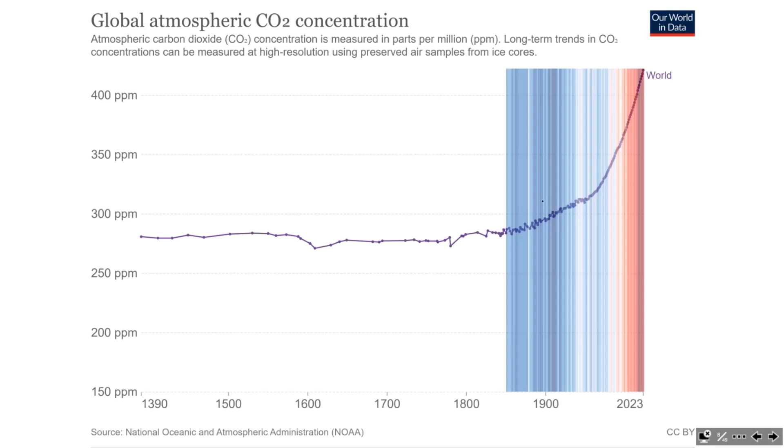Flooding in Pakistan, this is 30 billion dollars worth of damage. 30 million people affected, 1 million homes destroyed, 2 million people displaced, and this was last year.

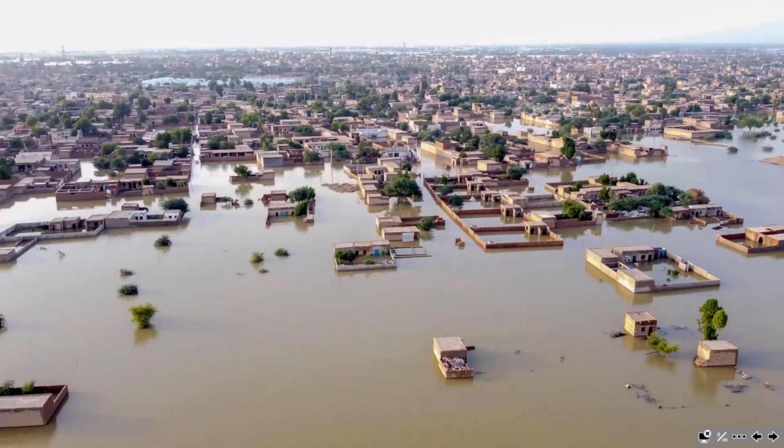Wildfires in Canada. This has been burning since April. Today, I checked this morning, there are 700 separate wildfires burning in Canada, still out of control. It's the worst wildfire season on record in North America.

And we're going to see more of it. It's not going to get better, it's going to get worse. We're going to see massive loss of biodiversity, environmental destruction, crop failures, loss of safe drinking water around the world, mass migration, and conflict. Coming back to that $30 billion of damage in Pakistan, the estimates from the IPCC, the Intergovernmental Panel on Climate Change, are for annual damage of the order of 500 times that when we seriously get out of the foothills and up into the mountains of climate change.

Again, another really important graph where what you're seeing is kind of fairly obvious. These are annual CO2 emissions. In 1850, the United Kingdom were responsible for half of the annual CO2 emissions in the entire world. We have played a major part in this in our history.

And again, what's interesting on this graph is not that obvious correlation between pumping CO2 into the air and temperatures constantly going up. It's what happens on the right-hand side of this. We need to change, and we need to change really quickly. And we are not, as I said earlier, we are not immune to that as bridge and masonry arch engineers.

People will tell you, bridges, really? We need to worry about bridges in net zero? We've got electricity to worry about. We've got to decarbonise the grid.

Unless they all get to net zero, we are continuing to increase the global atmospheric concentration of CO2. And if we are continuing to increase it, we are continuing to increase the temperatures and the associated damage. And it does not stop until it all goes to zero, or we find some magic way of taking CO2 out of the atmosphere to balance it.

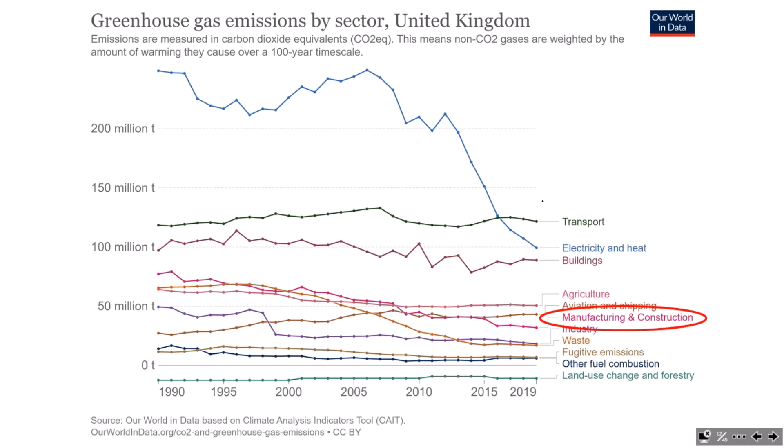So our bit, this is what we're talking about. We're playing a part in that bit there, manufacturing and construction, and decarbonising it.

So a little zoom into construction. Why is construction a problem? I think some of you will know about this. This is another graph. I'm nearly going to finish with the graphs, hopefully.

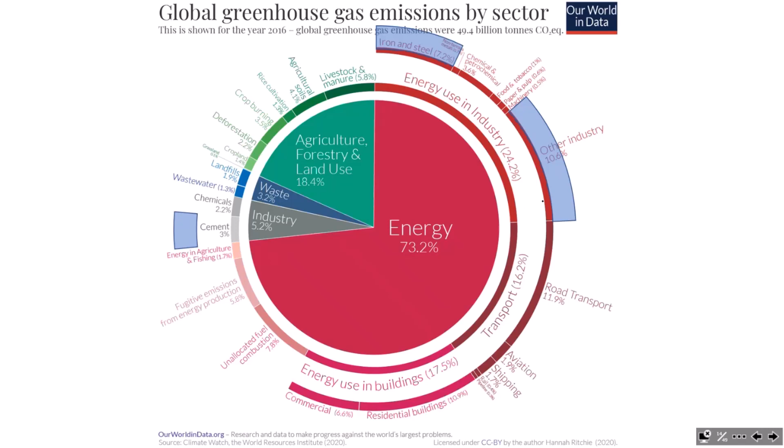And for the things we deal with in construction, it is overwhelmingly about production of materials, production of cement, concrete, and steel in our cases. Site logistics, site plant, transport, these things matter undoubtedly, but materials is where we're at. Our use of materials is our embodied carbon that appears on those graphs.

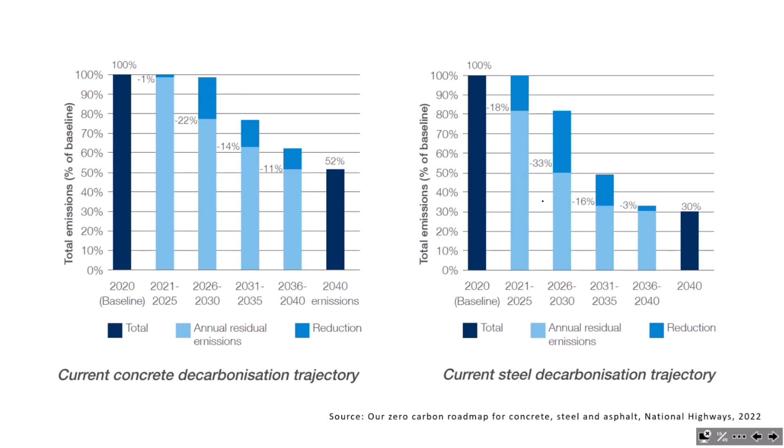These forecasts, the pale blue line, are the predicted trajectory for materials based on conversations with suppliers, so this is what suppliers are telling them they think they'll achieve. On the left, concrete, suppliers are saying by 2040, which is way too late, we'll probably get down to about half the emissions of making that material today. Steel is a bit better, it's much easier in the steel industry if people invest in it. These are difficult materials, and the key to addressing them is using less of them, because we're not going to magic away their emissions technologically.

That leads into climate action. So what does that mean we actually do within the construction industry? Bit by bit, you'll hopefully see me inching towards masonry arch bridges here. I know people want to get to that bit.

We're quite fortunate in the construction industry. We've got this very good standard, PAS 2080, carbon management for buildings and infrastructure. Excellent document, it tells us what to do. It's a process-oriented document, it's really boring, it's the quality assurance of carbon. But it has within it some real gems and some real key things that people can take away.

One of them is another graph, a slightly simpler graph this time, called the carbon reduction hierarchy. The entire construction industry should be thinking about three things when deciding what to do differently. The first is avoid, meaning avoid doing things that cause emissions, unless we have to do those things to reduce emissions elsewhere. Building wind turbines, for example, you can't avoid putting steel into wind turbines if you want to reduce energy sector emissions.

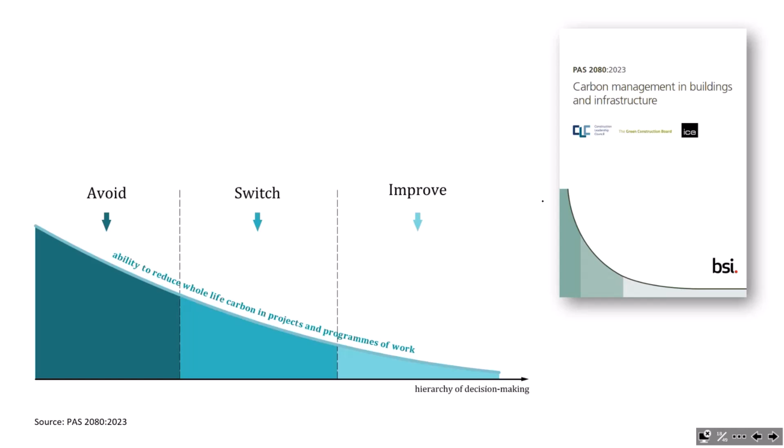Switch means making different decisions, perhaps a different type of bridge, or different materials in a bridge, in our case. Avoid might mean not building a bridge at all, where that's feasible. And then improve means being more efficient, efficient use of materials, structural optimization, those sorts of things. Once we've decided we're going to build it and roughly what kind of thing it'll be, can we do it with less stuff? So they're quite a good lens to look at what we do.

PAS 2080 provides the inner rings here, a lovely project life cycle, this is PAS 2080 and GRIP and RIBA all mapped against each other. If you read between the lines in the standard, it's roughly saying the best time to avoid big emissions is in the strategic definition phase of a project. If you can decide you don't need to build this project, or do it in a completely different way, build a ferry instead of a bridge, you're going to avoid a lot of emissions. We can't always do that, so we get into the optioneering phase, look at how we can do things better, make some different decisions - that's switch. And then the rest of it, design, delivery, operation, etc., is improve, trying to do things more efficiently.

This is from PAS 2080, the stuff around the outside is just my interpretation of it. And I think this is wrong, particularly in respect of what we're here to talk about with masonry arch bridges. I think this is a better diagram, because actually our best opportunity to avoid using new stuff, to avoid making the decisions that generate new projects, is in the operation and maintenance phase. Keep our existing stuff valuable, keep it usable, repurpose it, recover it, revitalize it, because then you don't get into this need to build new stuff at all. We see a lot of that in this industry, and actually we see a lot of it in the masonry arch bridge world - bridges being infilled, renewed, replaced, where maybe they don't need to be.

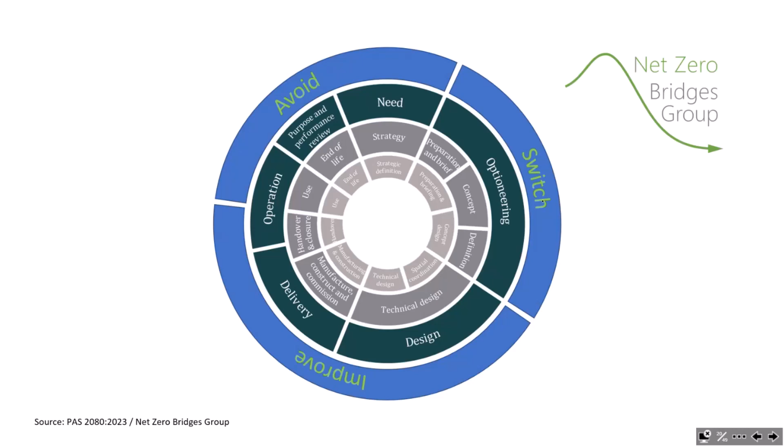Let's just be a little bit tentative about it for now, we can have an argument later. But nonetheless, that maintenance cycle, which is what ERMABI is tackling, and our understanding of existing assets primarily, that's our key opportunity to save loads of carbon. So you're all fighting the good fight if you're involved in that. So, masonry arch bridges - okay, no idea where I'm at for time without my notes, hopefully okay. Right.

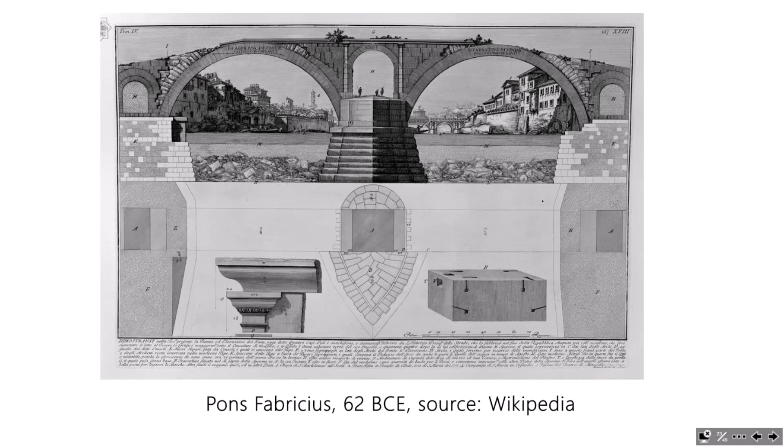Literally walk 50 metres away from that on the same project, we start getting into things that become slightly less straightforward. This is a brick arch pier railway viaduct. Hamish knows this well, along with some of my colleagues. This is really quite an interesting one. This is an existing brick pier, which had cracked down the middle of the outside face and appeared to be operating as two leaves, operating semi-independently, with this crack, like a sort of shear failure right down the middle of the thing. Again, good luck finding that in standards that John Shave refers to, or possibly even analysing it with some of the tools that we've got today.

We stuck some pre-stressing bars through it and stitched it back together. It stopped doing that and we walked away. But we might like to do better. We might like to understand a little bit more about, did that work? Was it safe? Freight trains were running over the top of this on a pretty much nightly basis. We don't know, frankly.

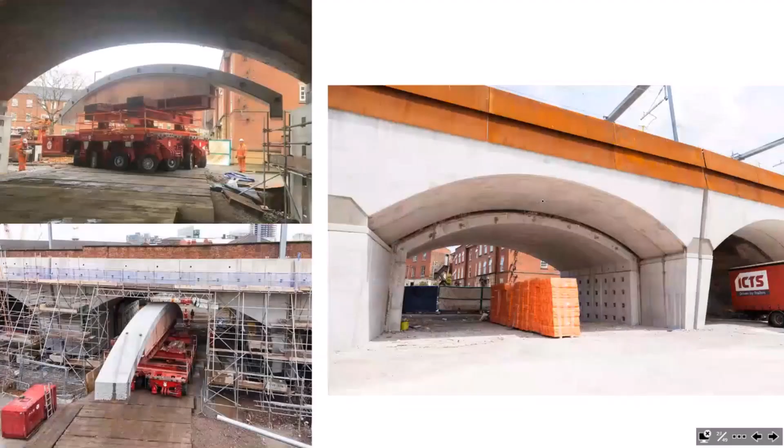So us engineers, we love our concrete, belt and braces. What are we going to do about it? Not really sure. Let's underring it with precast concrete. Let's pre-stress the precast concrete together. Let's stitch the piers together with pre-stressing and new foundations and all the rest of it.

Definitely sorted the problem, I'm absolutely certain. Was there anything else we could have done? We had lots of ideas, lots of theories, but did we really understand what was going on? I'm not sure we ever truly did. Did we understand whether it was safe, given we were continuing to run trains over this daily, with an RA rating less than the assessment required, let alone all these cracks, even before you take the cracks into account?

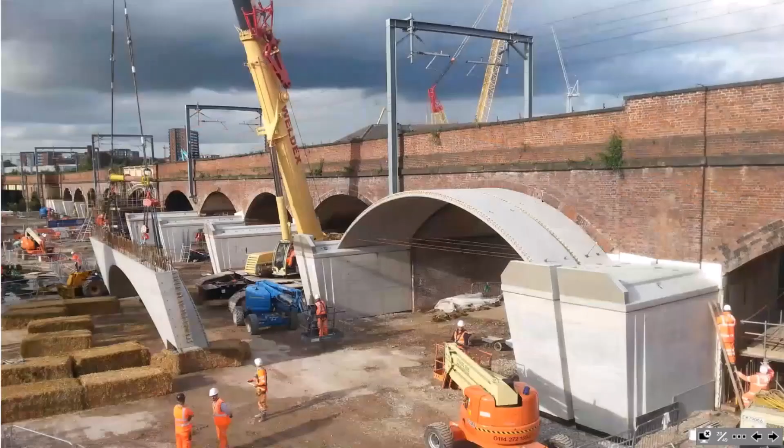Those pictures also illustrate one of the other things we do. We don't just preserve existing bridge structures unaltered. A big part of our work is alterations. This was widening of the same viaduct to move the railway over and put in a new railway junction, all done in precast concrete, really complicated stuff as you can see.

The interesting bit was trying to work out what would happen at the interface. The original proposal was to stitch the two in with stainless steel stitching bars. We were a bit nervous about that, to be honest, so we employed our friends at Bill Harvey Associates, who set up cameras and measuring poles, giving us graphs of movement vertically, longitudinally, and sway.

The movement of this bridge is phenomenally complex, moving in three dimensions like this every time a train goes over it. It gave us the confidence to deal with the interface issue, so we wouldn't damage the track or the interface going across it, and could tolerate the movement. This is about movement rather than capacity, but it's really all about understanding whether we know how these things behave and whether they're safe.

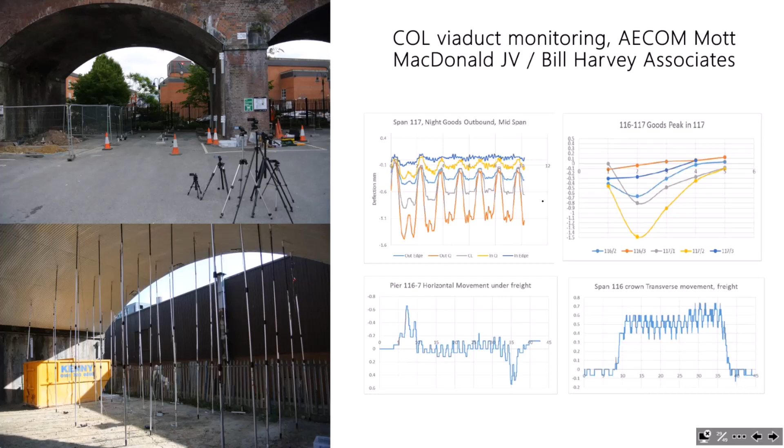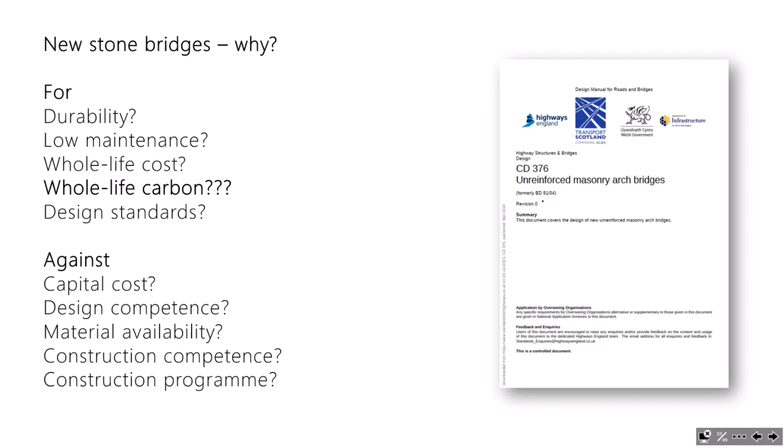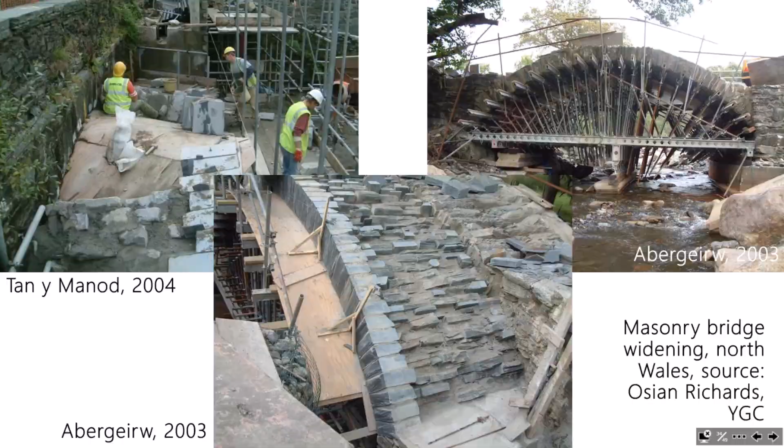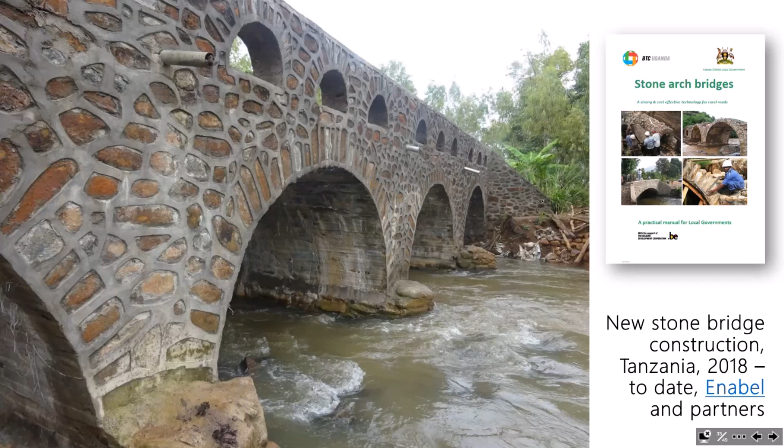Some people will have seen these before - this is out in Tanzania, a very different sort of economic and construction circumstance. These are partially funded by the Belgian Development Agency, Enabel. They've got a design manual, and I think they've done about 70 of these so far. Within that situation, it's pretty much definite that these are cheap, high social value in terms of employment, low carbon, robust, durable. Why would they not be doing this, other than some other country wants to sell them loads of steel or something like that? So it can definitely be done, and not with massively high technology.

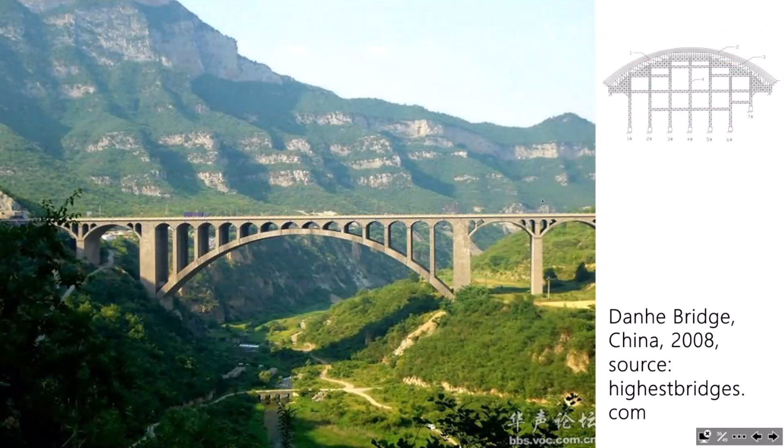The classic favourite - anyone want to guess what the span of this is? I can't tell because I've not got my notes, but I think from memory it's 150-odd metres. Probably certainly the last very big masonry arch bridge the Chinese are going to build. Even for the Chinese, this was getting expensive when they got to these sorts of spans, and you can see from the scaffold at the top right quite why that is. But that's going to be a very durable bridge short of earthquake - that's going to last a long time. We're not going to be worrying about rusty rebar and concrete cancer and things on that.

So apologies if you're just here for the arches - I'm going to slightly move away from arches, and this is moving away from arches very quickly.

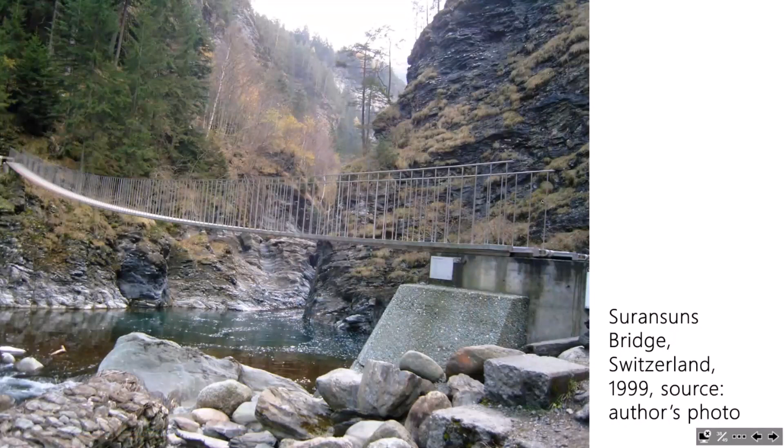Things we know about stone - this is a classic stone bridge, Punt Suransuns in Switzerland. It's not an arch bridge, or is it? The stone here is restrained and pre-stressed by the stainless steel bands upon which it sits, so all the stone on this bridge is in compression, just like an arch, really - it's upside down, but never mind. Having jumped up and down on this with a load of bridge enthusiasts, it's really stiff and massively economical.

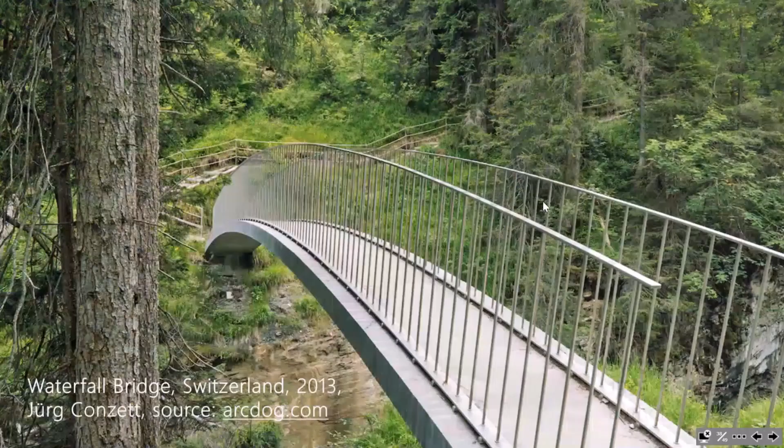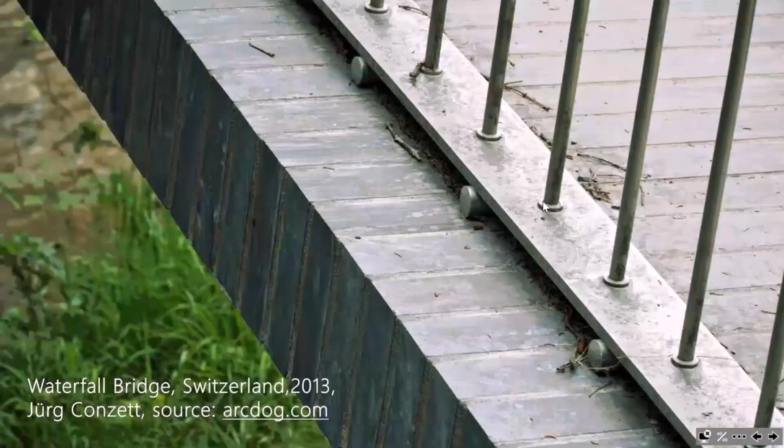What would happen if you turn that upside down? This was designed by the great Swiss engineer Jürg Conzett, and he has turned it upside down - this is the more recent bridge, the Waterfall Bridge, done the other way around. Again it's just stone blocks, a very slender arch, pre-stressed by stainless steel bands which form the bottom of the parapet on top of it, pre-stressed in at either end, allowing you to make it very slender - keeping your thrust within the arch, if that's how you want to conceptualize it. It's a really ingenious little piece of bridge. The stainless steel band sits on rollers, which give you a frictionless surface when you're pre-stressing it, and incidentally they also mean you don't need to drill through the stone to support the parapet - the parapet is just supported by the fact that it's pre-tensioned on.

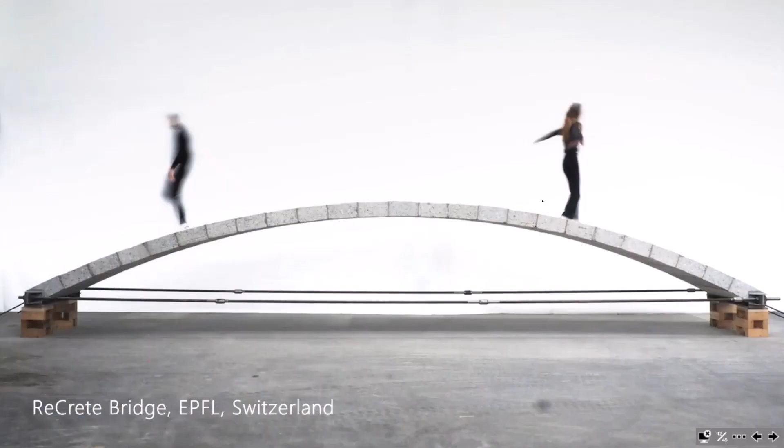And just to finish off on the subject of arches, if you definitely really do want low carbon, the ReCrete Bridge from Switzerland is a fantastic example. This is just in a lab, but there's no reason why it couldn't be somewhere else. A 10 to 12 meter span from memory, 20 centimeter thick blocks, pre-stressed again, conventional pre-stressing this time, drilled through the center of the blocks to maximize the structural efficiency, and all made from recycled concrete.

These concrete blocks were cut, disc cut or water cut from a building in Switzerland when it was demolished. And if you want low carbon, that circular economy stuff, reuse, that's definitely low carbon.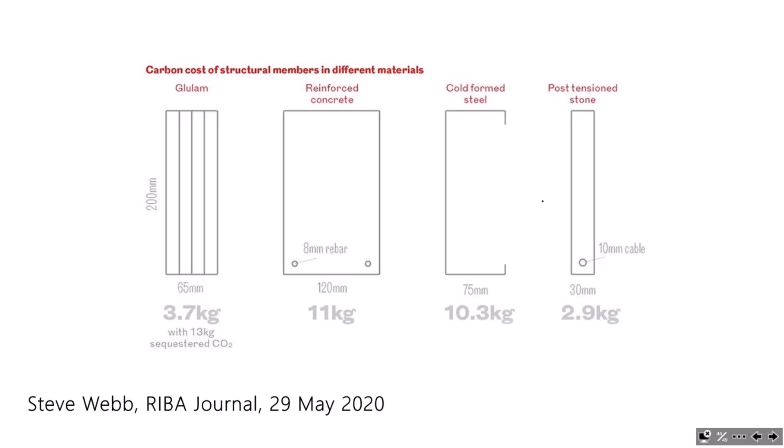If you can tear yourself away from arches for a moment, there is also a future for pre-stressed stone just in beam form. This comparison shows quite clearly that because stone has very high compressive strength, or can be, you can get some very efficient structures and very low carbon compared to concrete and steel.

First proposed in the 1950s - come and talk to me afterwards if you want to argue about whether this was actually feasible or not - it wasn't built. But Heinz Hossdorf, really great, a great engineer, so maybe it could have been done.

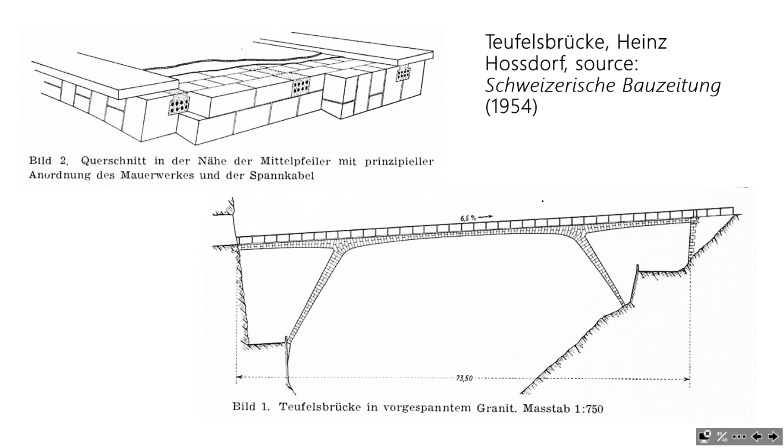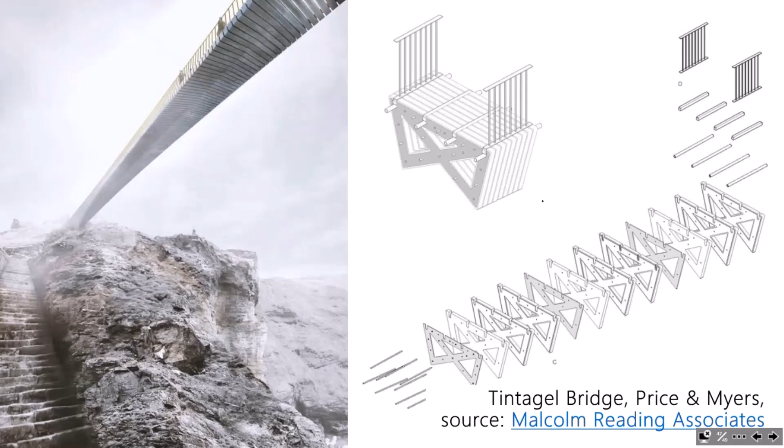And this slightly more crazy example was for the Tintagel footbridge competition in Cornwall, Price and Myers - a 70 metre span, with those 100 millimetre thick stone sections, water jet cut, pre-stressed together in a shallow arch form. Feasible, but again, probably best not to comment further.

But what I took from all of these is that stone is in the air. It is worth thinking about. People are beginning to think about how we might use this in a sensible way.

Super quick wrap up: the climate context is real. It is an emergency. It may not be happening right out there right now, but it is affecting somebody somewhere else in the world right now, absolutely guaranteed. Construction is a pretty big contributor to that with our use of steel and cement in particular, and we need to do something about that.

Climate action for us means avoiding new emissions wherever we possibly can, rather than designing super smart structures. And avoiding new emissions means preserving our masonry arch bridges, and that means understanding them better, which is what this conference is about.

Is there a future for stone? I think there is, actually. I see some of my colleagues talking about this bit by bit on the schemes where we're being asked to innovate. I see them talking about it more and more. So yes, I think there is.

And if we can understand the theory again better, that will give us the confidence and the competence to be able to build those in a way that is bold and helps us fight against climate change. Thank you very much.

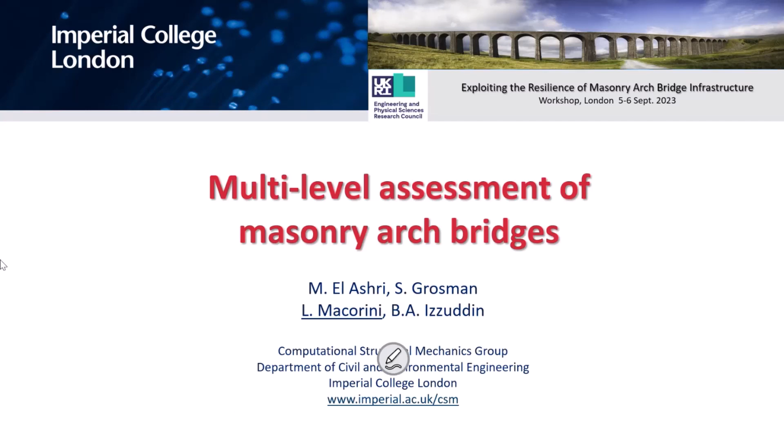In my contribution, I'm going to summarize the results obtained by the Imperial team for a multi-level assessment of masonry arch bridges. The research integrates within the ERMABI project and is linked to the other parts of the project.

In the main, we're going to use validated high-fidelity models to generate response performance data. This is to develop an objective multi-level assessment framework.

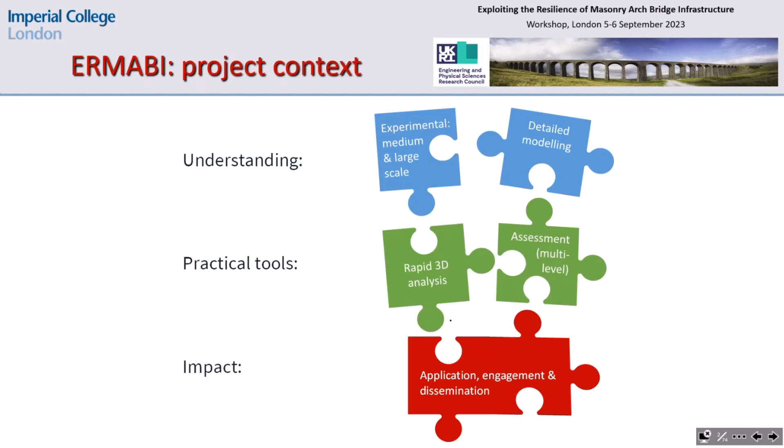A brief outline of my presentation: I will provide a background and context for the research, remind the main features of the response of masonry arch bridges and the multi-level assessment framework, then summarize the main features of the computational strategies developed at Imperial, which we've been using to study the behavior of masonry arch bridges.

I will set out the scope of the parametric study, presenting the geometrical and mechanical characteristics of the structures under study. Then I will present and discuss some illustrative results, focusing on the interaction with spandrel walls, the link between 2D and 3D models, and the consideration of reduced models based on simplified assumptions for the masonry materials.

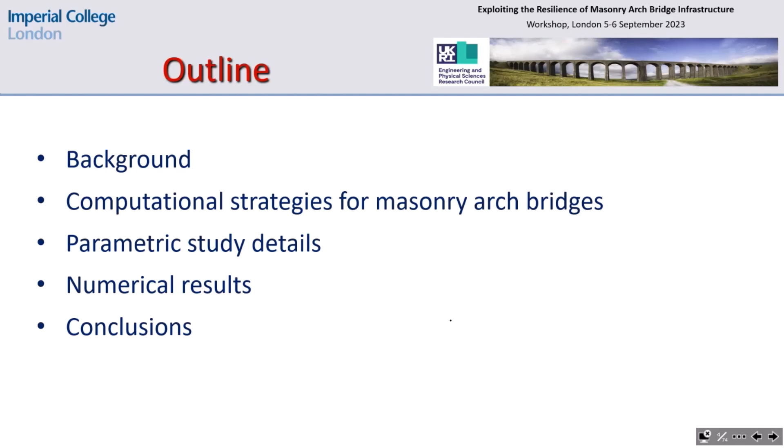As we know, masonry arch bridges are relatively complex structures featuring 3D behavior. In this study, we consider single-span masonry arch bridges where masonry arches interact with backfill material and spandrel walls. Our main assumption is that accurate models should take into account this complex interaction between the different parts, modeling them separately while accounting for mutual interaction.

At this stage, I believe we are familiar with multi-level assessment, as it was recalled in a previous presentation. We can use different strategies characterized by different levels of sophistication, where detailed models are level 3 models, able to describe fully all the components with realistic material parameters. We use these advanced models, which we call high-fidelity models, as the starting point.

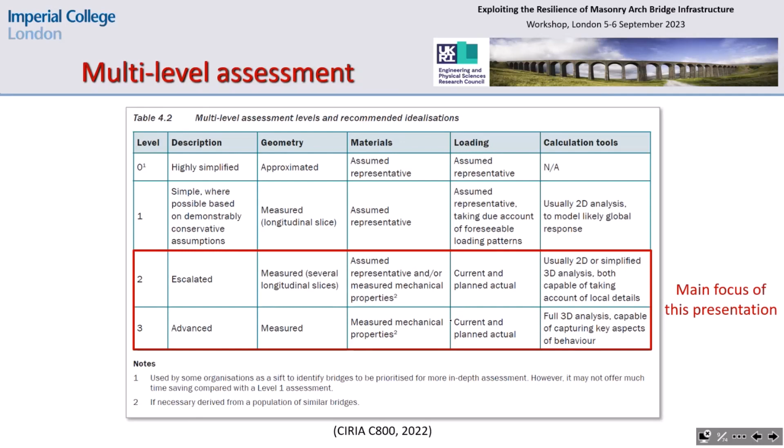We then reduce the complexity of the model by reducing the dimensionality, moving from 3D to 2D models, and then simplify the material description for masonry. This is the main focus of this presentation.

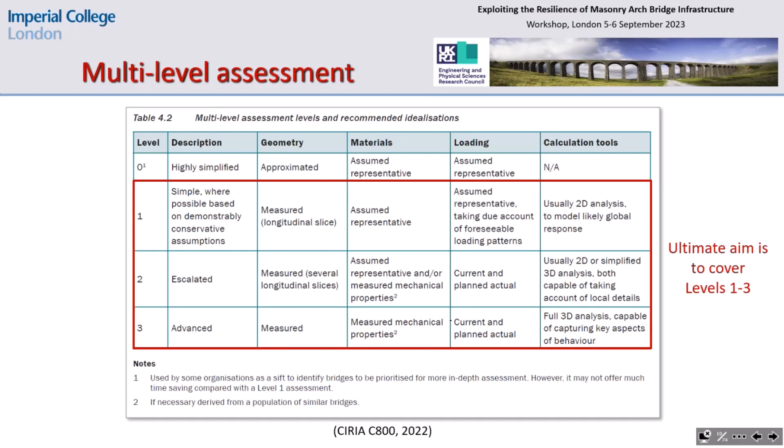Within the project, we're also going to link detailed high-fidelity models with lower level models for more rapid assessment. Currently, rapid assessment tools are mainly 2D, allowing for arch-backfill interaction only, with different levels of sophistication, but in some instances they are not conservative. So there is a need to put forward a more consistent framework leading to a safe design.

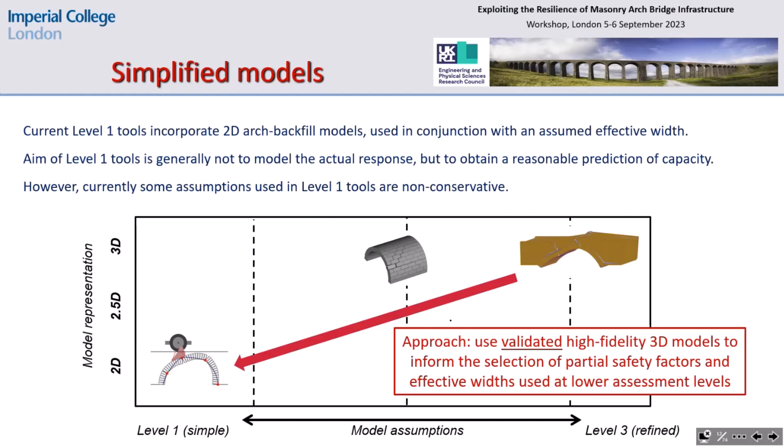Our approach is to use validated high-fidelity models to determine a partial safety factor for reduced models. Importantly, we also use high-fidelity models to define instances where 2D models are not suitable.

It is important to stress that to achieve accurate predictions, it's important to describe properly masonry as a construction material. It is relatively complex and definitely anisotropic, and the response depends upon the characteristics of the individual components but also on the masonry bond.

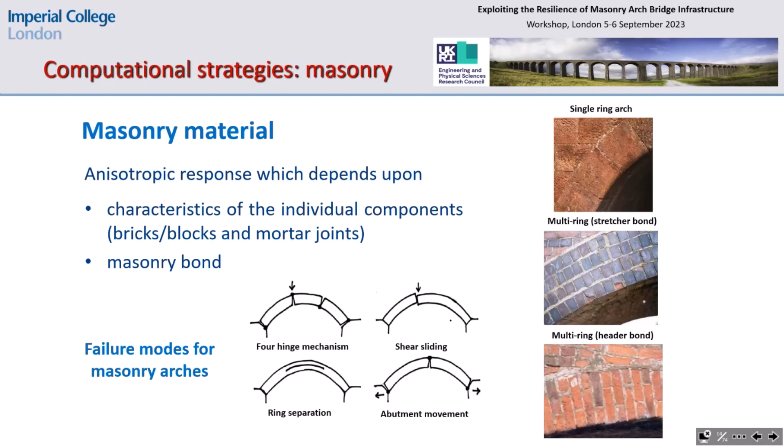With accurate models, it's possible to predict complex failure mechanisms. In this case, we have the typical four-hinge mechanism, but also ring separation and shear sliding mechanisms, which can only be captured if we take into account this anisotropic response characteristic.

In this context, we can adopt different material models for masonry based on different scales of representation. Typically, within nonlinear finite element analysis, we consider macroscale models where the material is assumed as a uniform isotropic material. These models are more efficient, but the calibration of material parameters is more problematic because it should be based on component tests.

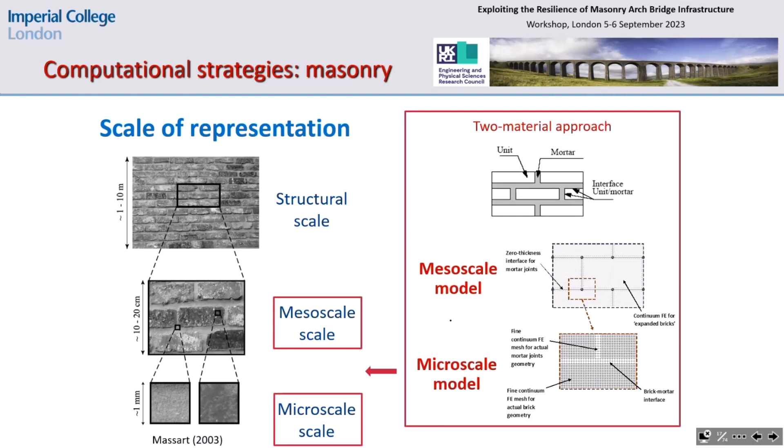As an alternative, one can adopt more sophisticated models that take into account the characteristics of the constituents independently, representing units and mortar joints separately using what we call mesoscale models or very detailed microscale models. In this case, we can determine material properties from material tests on constituents, but the main drawback is the computational cost, since the computing time for these models is very substantial. So they are suitable for high-level simulation of a problematic structure.

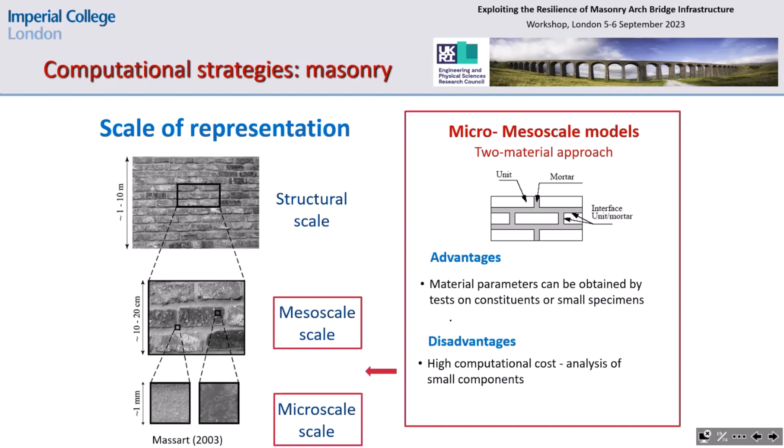After defining the context, I'm going to illustrate the developments within our group. We developed sophisticated 3D high-fidelity models where masonry is modeled at mesoscale.

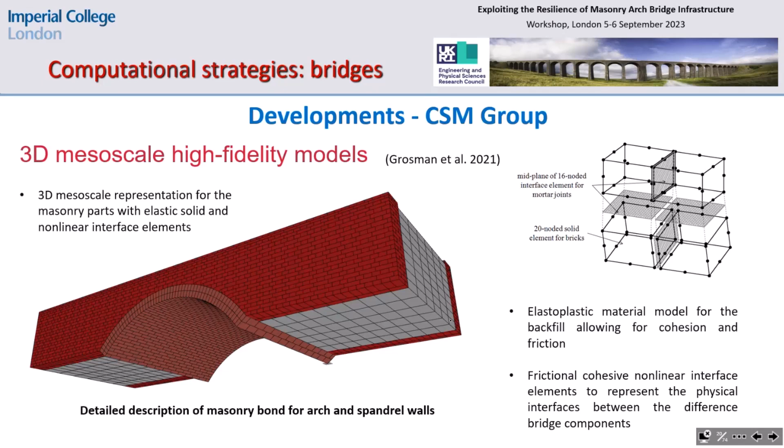We model each component, each unit, and the mortar joints, leading to a very accurate representation of the structural component. The backfill is explicitly represented as a cohesive material with friction, and we also take into account the interaction between the different parts using nonlinear interfaces, allowing separation.

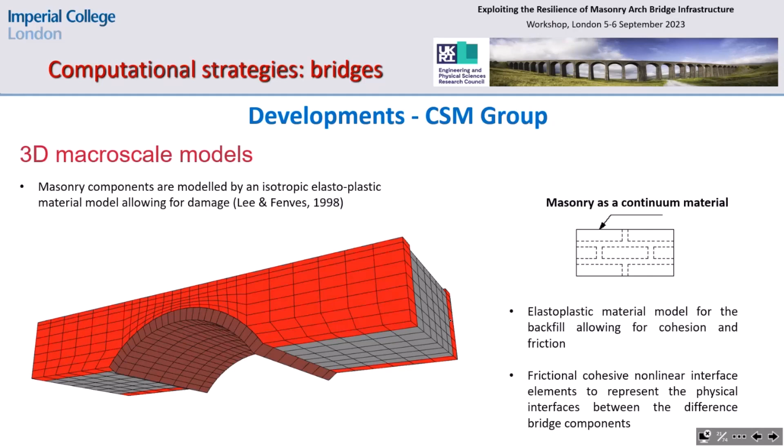As an alternative, we developed also more efficient macro-scale models. In the following we call them reduced models, but they are not very simplistic because they're still based on nonlinear finite element simulation, and they are still 3D models. But in this case we don't follow the actual bond, we use a reduced mesh where the material is represented as a uniform isotropic material.

Thanks to some advanced computational tools within our group, we can simulate the response of real scale structures using detailed models because we use partitioning strategies allowing for parallel computation. We divide the large structure into partitions and run each partition independently using separate processors. This will allow us to speed up the simulation and to analyze also large structures.

So we're going to elaborate on these concepts in the presentation tomorrow, where the high fidelity models developed in our group will be presented in more detail.

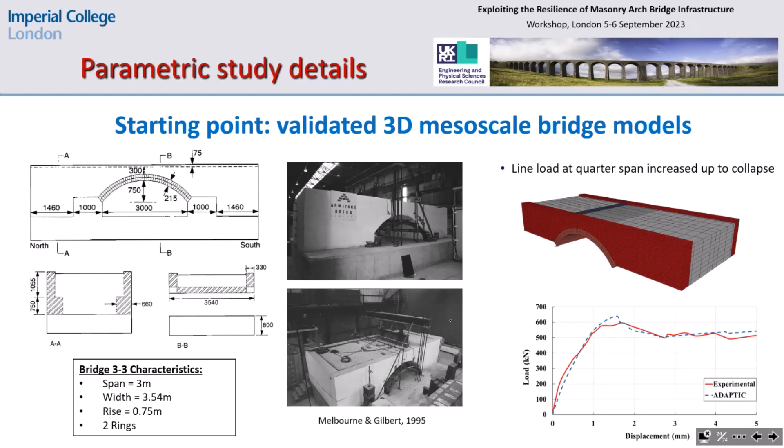So, parametric study. The starting point is the availability of validated high fidelity models. I'm going through quickly here some stages of the validation, where we consider previous full-scale material tests. We develop high fidelity models and simulated the response, obtaining good comparisons in terms of stiffness and load capacity.

Importantly, we are able to fully represent the failure mechanisms involving not only the arch but also the other components, like in this case spandrel walls. So the response is fully captured in 3D, and we are able to represent the behavior of the spandrel walls subjected to the lateral pressure exerted by the backfill.

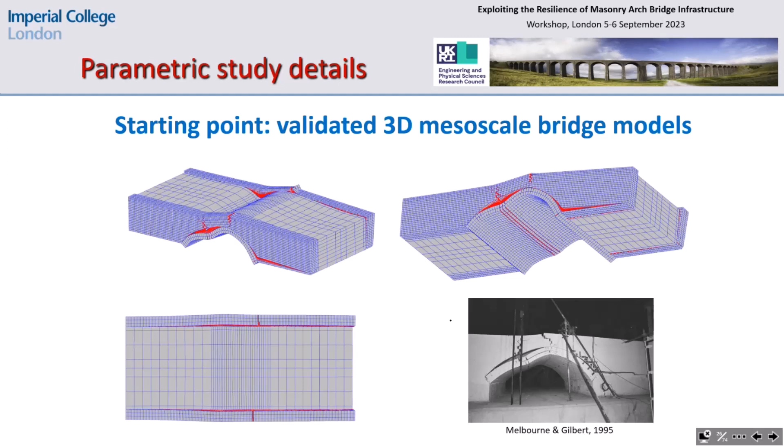In the main, the high fidelity models have been validated at large, and now they represent a unique tool to investigate the response of real structures.

So within the parametric study, we use the validated high fidelity models to study different aspects of the bridge response. As I said before, in the main we generated an amount of performance data which are important to understand the 3D behavior of the structure and to link the 3D response to the response predicted by reduced models.

In the main, we analyze the contribution of spandrel walls, comparing the full 3D models where each component is represented explicitly with models where the spandrel walls are missing. In this case, the backfill is confined along the transverse direction fully, but the spandrel wall contribution in the longitudinal direction is not taken into account.

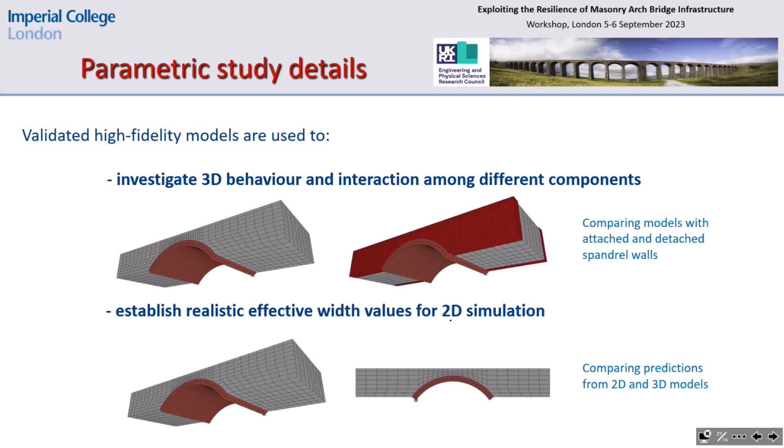So we investigated also the link between 2D and 3D models. In this case, we consider a 3D model without spandrel walls, and we link the prediction to the prediction obtained via a 2D model. It is important to stress that the 2D model here is still developed using a high fidelity model, so we represent fully the bond characteristics of the masonry arch.

And finally, we compare the high fidelity predictions against the prediction obtained using a reduced model. In this case, we use a macro scale model for masonry, a standard plastic damage model, one can use in different commercial software for nonlinear finite element analysis.

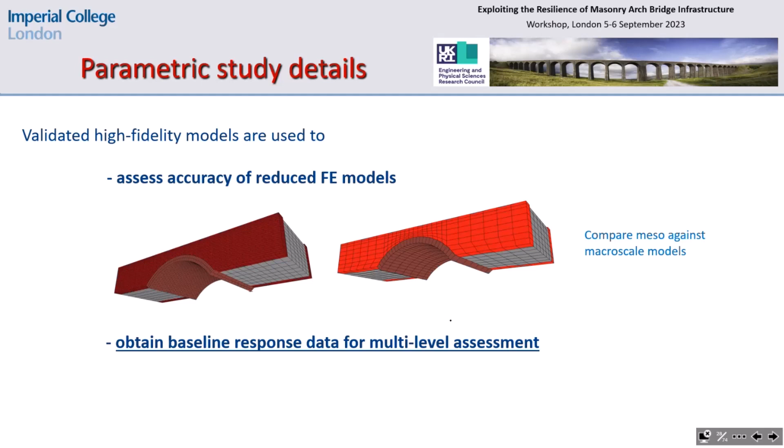So I wanted just to pay attention to the size of the problem. Also, when we consider a reduced width of 3 meters, the size of the problem becomes significant. We're talking about models with a number of degrees of freedom well above the million, so models which can be simulated only using superior computational resources.

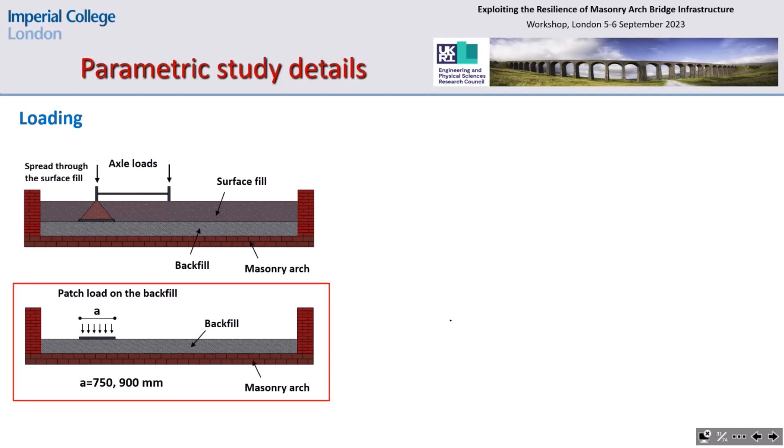So about the loading: we consider a typical axle load. We allow for the spread through the surface fill, and we end up with this loading scenario where the top of the backfill is subjected to a patch load, and then the load is transferred via the backfill to the arch below. Of course, the backfill is confined by the lateral spandrel walls.

And then we consider different loading positions, because the 3D behavior is triggered by the position of the load. So for different width values—not only one single width, but different width values, 3 meters, 6 meters, 9 meters—we consider different loading positions: mid-span, quarter span, mid-width, and quarter width. So we generated a large number of models and simulated this model population to obtain performance data.

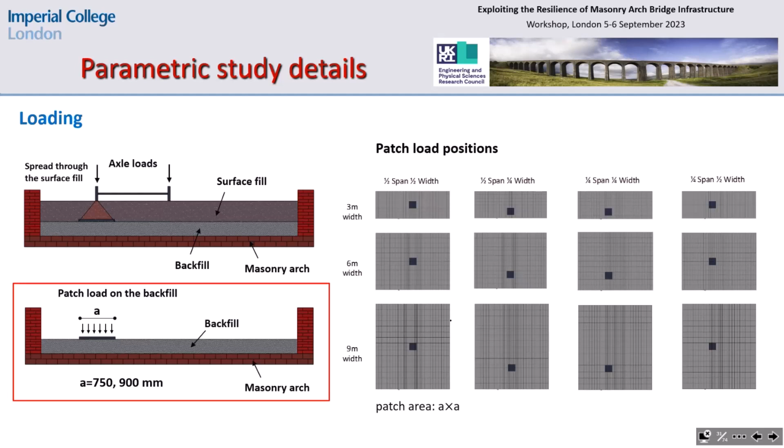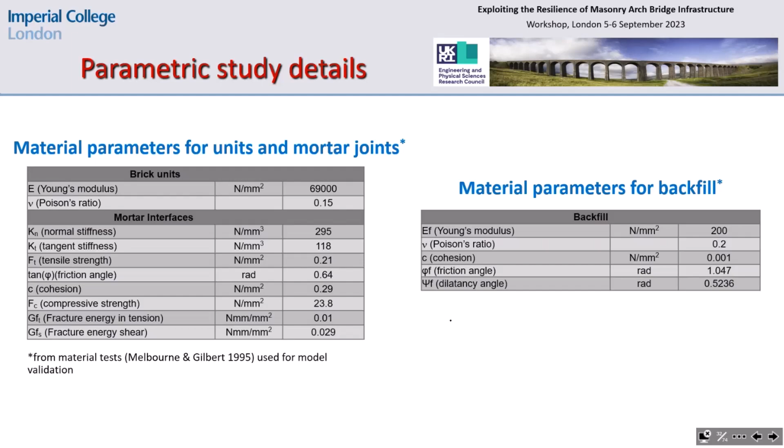Regarding the material parameters, we use the same material parameters adopted for model validation and obtained from material tests in previous research. We start now discussing the results we got in the parametric study.

First of all, we start from the study on spandrel walls. As I said before, we consider models allowing for spandrel walls in detail, and models without spandrel walls, where the backfill is fully confined along the transverse direction.

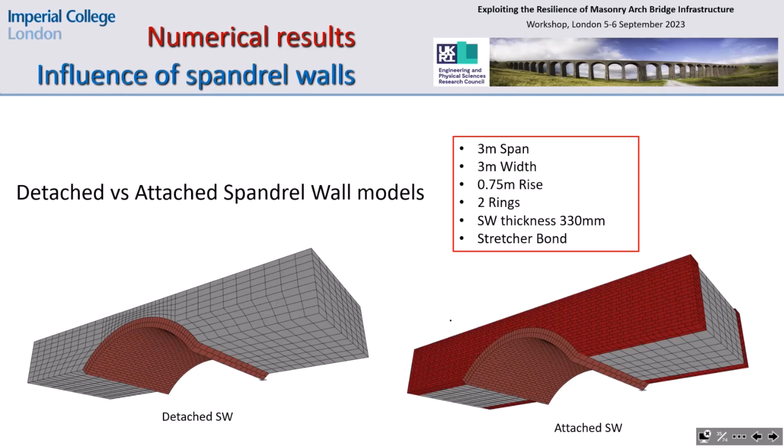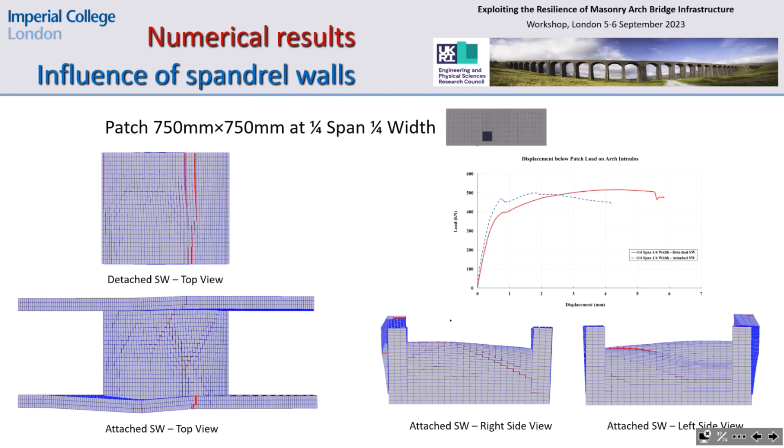If now we move further, the load is applied at quarter-span, quarter-width. We see now that the out-of-plane deformation due to damage of the spandrel wall becomes more significant, and the ability of the spandrel wall to contribute to the load carrying capacity of the structure is reduced.

This summarizes that it is important for an accurate response prediction to allow for all the components and their interaction, because disregarding one of the components may lead to unsafe predictions. Now, quickly, I move to the comparison between 2D and 3D models.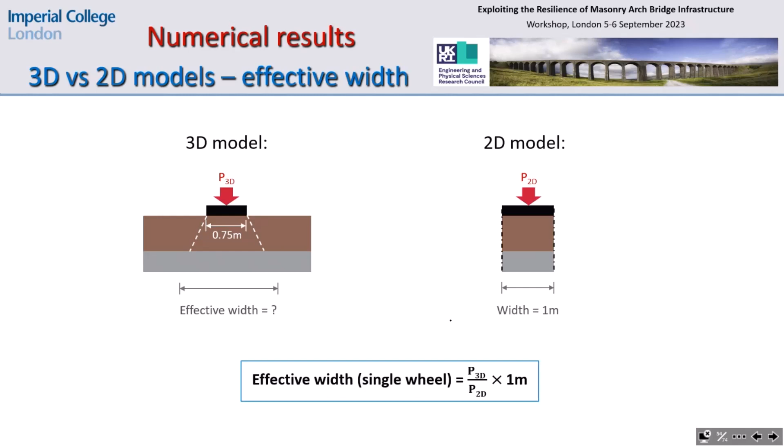In this case, we determine an effective width based on the load predicted by 3D models. The 3D model here is a model without spandrel walls. We remove the spandrel wall contribution to enable a proper comparison between 2D and 3D models. So the effective width is determined as the ratio between the load predicted by the 3D model and the load given by the 2D model. The effective width mainly depends on different factors: load position, backfill characteristics, and the 3D arch behavior.

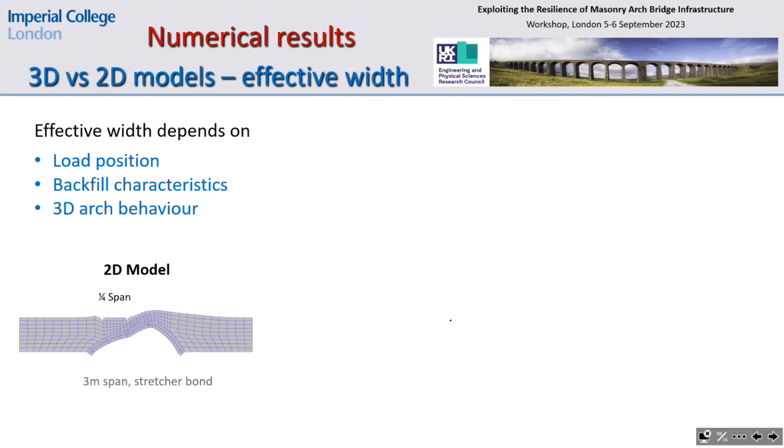So we started developing 2D models. In this case, I show you an example. And then we developed the 3D counterparts. Then for different width values, we apply the loads at different positions, and we obtain different response curves for different loading levels. This will enable us to determine explicitly an effective width for different scenarios.

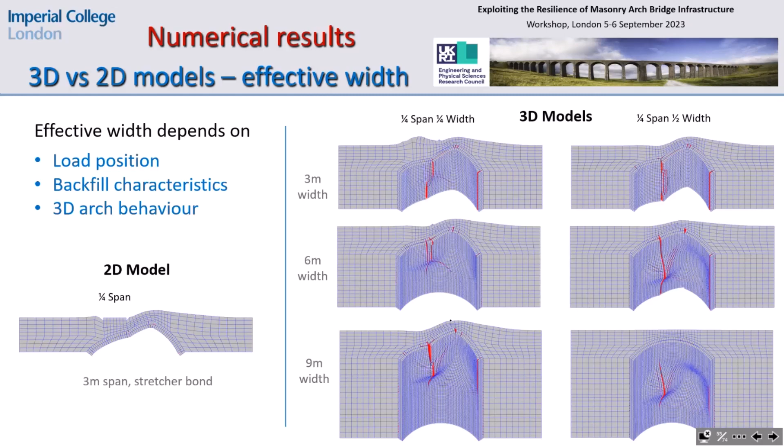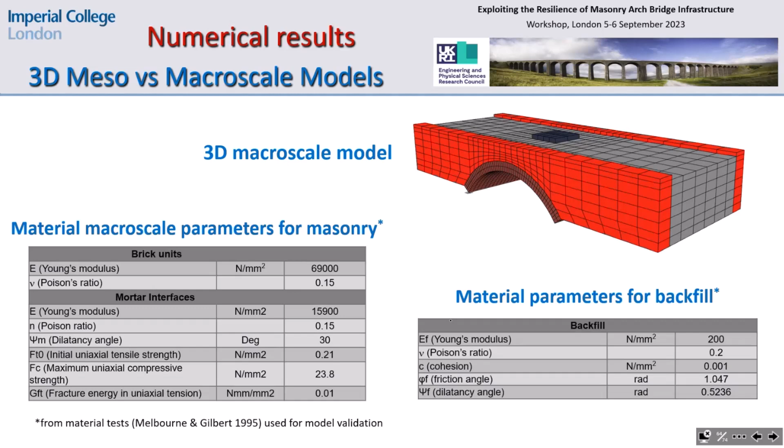Why? Because the stretcher bond suffers also from ring sliding, which is properly captured by the mesoscale model, but is not determined by the macro scale one. On the other hand, the header bond model doesn't suffer from ring separation and sliding, leading to a higher load capacity prediction. So it's important to note that the responses predicted by macro and mesoscale are in very good agreement until a relatively high loading level. So it means that the macro scale model can be used with confidence at serviceability level.

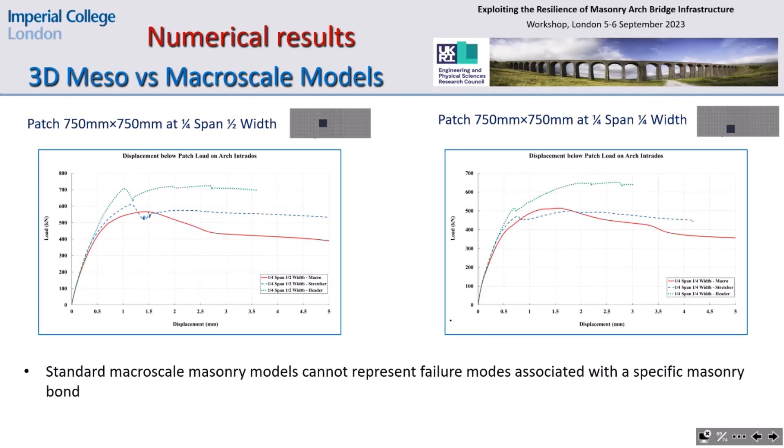But if we want to predict the actual failure mode, the use of a macro scale model with simplistic calibration may be misleading, may lead to inaccurate results. In this case, safe, but inaccurate results. So this is the same scenario. I move the loading position, and again, I obtain a similar prediction. Macro scale is fine for a certain bond; I change the bond characteristics, and then the results are very conservative. Is it always conservative? Unfortunately, not. And is the failure mode correct? Not always. So in the main, standard macro scale models cannot represent failure modes associated with a specific bond. So they require a more advanced model calibration. This is another important point.

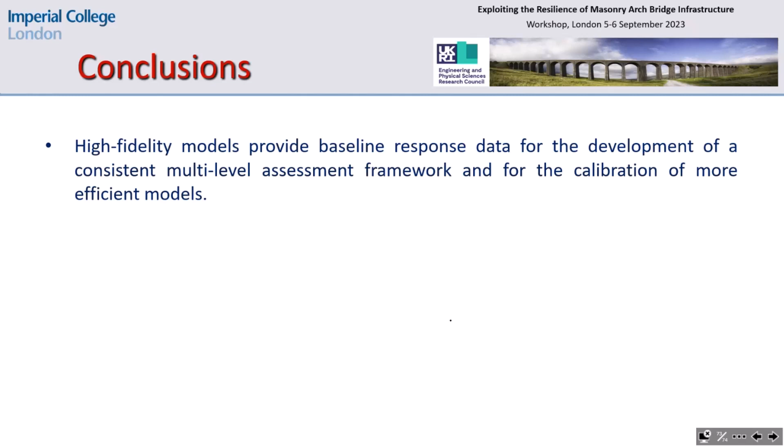So conclusions. We developed high fidelity models, which have been extensively validated. As I mentioned before, model validation will be discussed and presented at large tomorrow. They provide the baseline response data for the development of consistent multi-level assessment frameworks and for the calibration of more efficient models. Then safe assessment should consider the interaction between the different components, including spandrel walls. In the main, a weak spandrel wall may suffer early damage, which does not enable the spandrel wall to fully confine the backfill, and this leads typically to a reduced capacity of the integrated bridge structure.

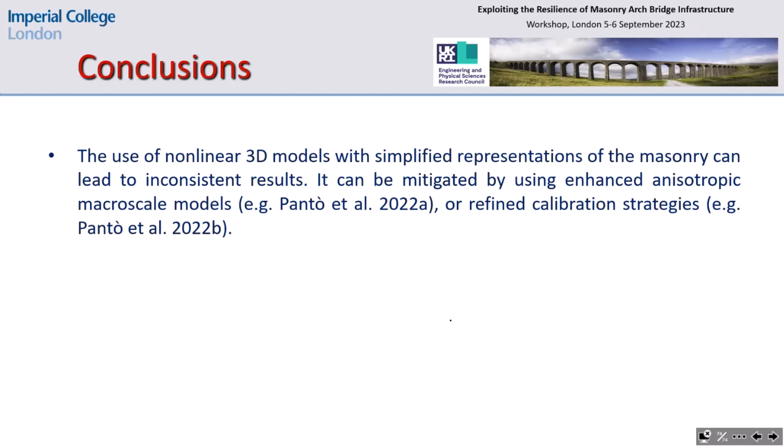So the effective width obtained in this study depends on different factors: load position, backfill characteristics, and, of course, on the 3D arch behavior, as we found comparing the responses of models with different width values. And then to conclude, the use of nonlinear 3D models with simplified representation for masonry can lead to inconsistent results. Within our group, we developed refined macro-scale models, an anisotropic macro-scale model, and improved calibration strategies, which improve the prediction, enabling us to calibrate macro-scale models which provide a closer prediction to the high fidelity ones. So this concludes my presentation.

Okay. When the spandrel... God, that doesn't sound like me at all.

When the spandrel wall moves outwards, how did that affect results, especially where a longitudinal fracture can develop under the spandrel wall, separating the arch barrel into, let's say, three separate arch barrels? How did that affect stiffness or deflections?

Yes, yeah, sure. Very clear. So I can go back to one of the previous slides. Sorry.

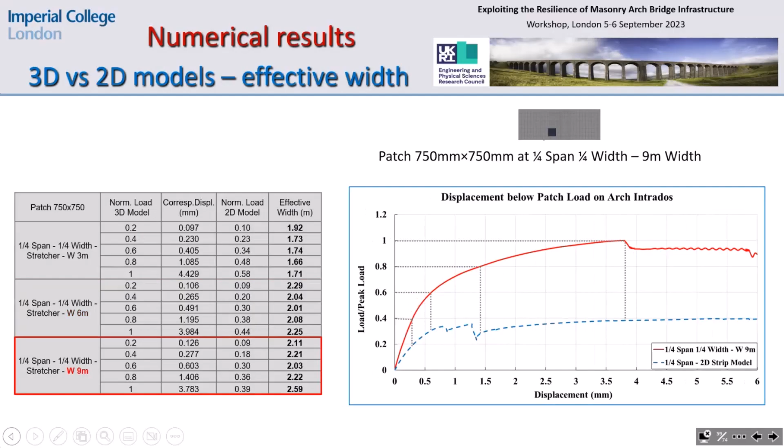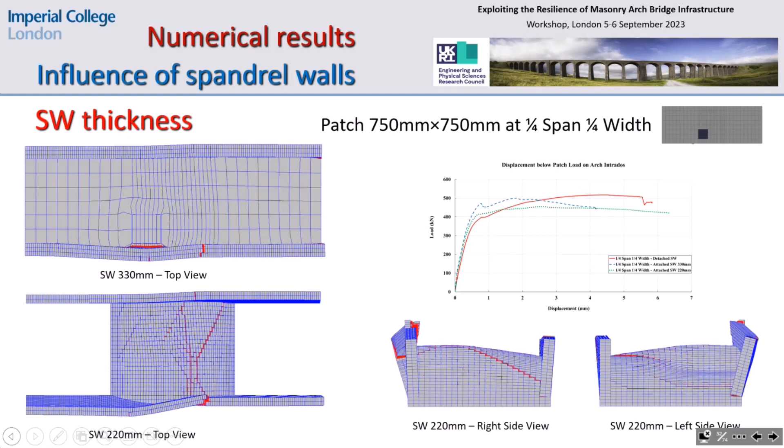So in this case, we have early damage in the spandrel wall, and it means that the spandrel wall cannot provide an effective confinement to the backfill. And so we reach a capacity without obtaining the same response as in the case of more solid, more substantial spandrel walls.

So in terms of modeling, as I told you before, we model the different components separately, but we model also their interactions. So we introduce computational devices, nonlinear interfaces, which enable separation between the parts. And these nonlinear interfaces take into account the frictional interactions between the different components: backfill, spandrel walls, and arches.